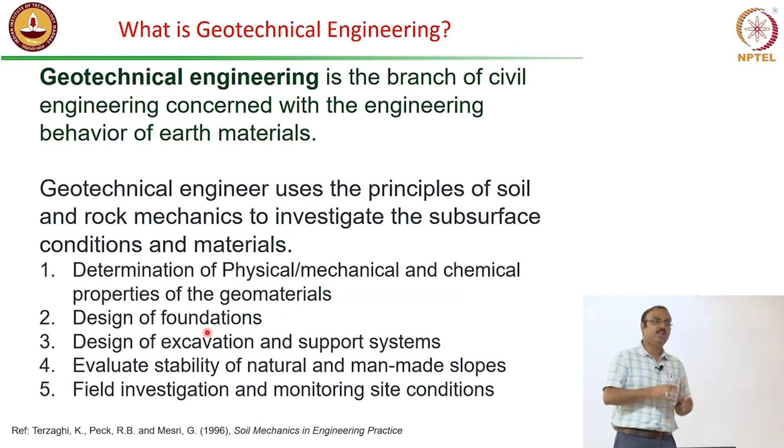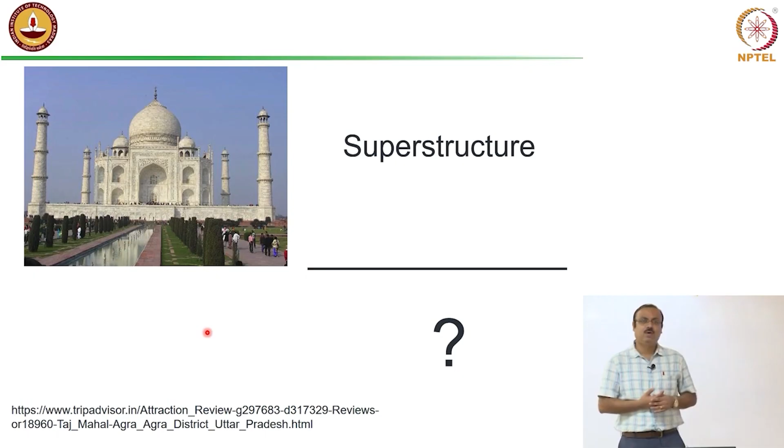Now everybody knows this, right? The Taj Mahal - it is one of the wonders of the world, but the problem is we all see the superstructure, but what is there at the bottom? We had almost no clue until several years ago. There were a lot of speculations, a lot of old scriptures that say what is there, how the foundation of the Taj Mahal is, but finally our structural group, Dr. Arun Menon, who has given a lecture on architecture and heritage structures,

along with the Archaeological Survey of India, excavated part of the site of the Taj Mahal, and what we saw is very interesting. This is the excavation we did, and this is the base of the structure, and this is what the foundation looks like - this kind of well-type shape. Have you seen this? This is a well. This is called a special type of foundation material element - it's called a well foundation.

It's just like your regular wells, below the Taj Mahal. There was a scripture about this, so we are not completely surprised to see this. There are earlier old scriptures which say that there is a well foundation used in the Taj Mahal, below that. So it's a very interesting thing.

So these are the wells. There are hundreds of wells below this structure, and inside these wells, it's filled up with any kind of debris, whatever was available nearby at that time, they just dumped it. Some wood pieces, some tree trunks, all kinds of stuff. They dumped it, did a little bit of compaction, whatever was possible in those days, and they built the structure.

And it was so nicely standing. There was no problem at all in the foundation or any kind of tilting of the superstructure. So these are very interesting facts. Without knowing foundation engineering itself, people were doing that kind of wonders, because these are coming from practical sense.

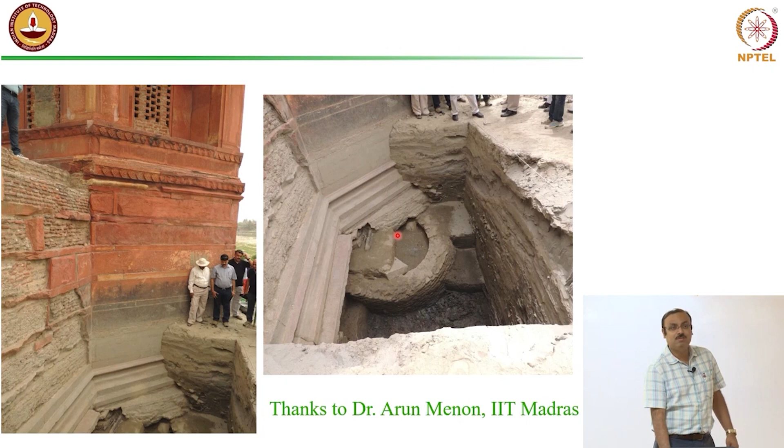So what does it say? Richard Handy says a very interesting comment, that virtually every structure is supported by soil or rock, except those that either fly, float, or fall over. It's a very cynical line, but this actually tells the entire story, that everything there is a foundation. Without foundation it will never be able to stand.

In his practice, a civil engineer has many diverse and important encounters with soils. So as a civil engineer you will just go through different situations. We have just started with the introduction part. Now you will see exactly what are the different challenges a geotechnical engineer will have, as a civil engineer, you will be handling.

First one, of course, as I said, there is a foundation. There are two types of foundations generally available. One is called shallow foundation. This is your superstructure, very obvious, and at shallower depth you have this slab. In plan, it will be something like this. So this slab is nothing but your foundation. This one we call it shallow foundation.

There are different types of shallow foundations available: isolated footings, combined footings, raft, different types. But one of the common features of them is that the depth of the foundation is not a very large value. Usually the criteria is that the depth of foundation should be less than the width of the foundation. That's the thumb rule we specify for shallow foundation. Shallow foundation is one which rests or which will transfer the load of the superstructure at shallower depth. That is the idea.

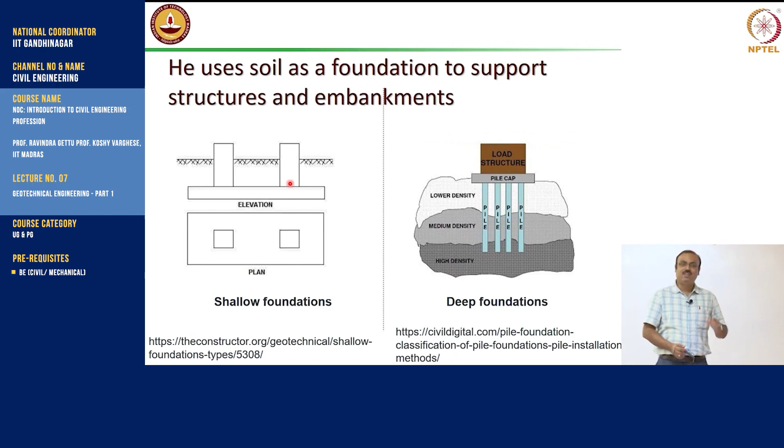Now, in those kinds of situations, what do you have to do? The foundation, by sinking itself, gave you a hint that there is a soil issue. It is not that the soil is bad; there is a soil which is slightly below that area, which can take that load.

So, that is why I am sinking up to a certain level. So, what you have to do is transfer the load to a deeper depth. That is where the term deep foundation comes into the picture.

So, now there is a structure, maybe a heavily loaded structure, then there are piles. These members are like your columns. It will transfer the load to a much better soil which has very high density. Maybe the rock itself can transfer the load.

It is very similar to your stools. Piles are very similar to the stools we sit on. You sit on top of some kind of platform, right? If there is no leg, what will happen? You and the platform both will collapse.

So, there are 4 legs to the platform. What are these legs doing? Your load, which is resting on that platform on top, gets transferred through those 4 legs to a ground which can take that load, isn't it? So, those 4 legs in geotechnical engineering are just deep foundations or piles.

There are many types of deep foundations. One of the most common is piles. Wherever the soil is good at a much lower depth, to reduce the settlement of the structure, we generally transfer the load to that competent soil layer. This is a key word, competent soil layer, meaning the layer is competent enough to take the load of the superstructure.

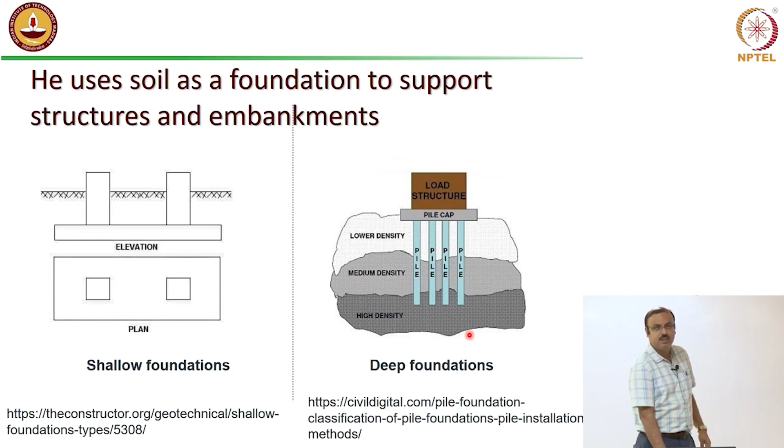Like a 4-legged stool, you can sit and it's safe, but if an elephant is sitting, it may break, right? So you have to design a stool, design those legs based on the loading. So, that is where the size, shape and depth of the piles will be determined by the geotechnical engineer.

Now, very important - the civil engineer uses soil as a construction material. How many years we have been doing this, I do not know. Since ancient times we have had mud houses, isn't it? This slide shows mud houses, very standard, still found everywhere in the villages. And technically it's simple, but it is kind of sustainable, as we are seeing.

Now, more importantly, the soil can be used as embankment material. Like you see, this is constructed using soil only. So this side is the water - what is the purpose of this? This may be the flowing river.

So what this embankment will do is, even at a raised height of water, it will protect so that the water will not flood the agricultural field. There may be cases where the rise of water goes beyond the height of the embankment, and then it will flow over, but that is an extreme situation. In general, under high flood situations, we consider what should be the height of the water, keep some 1.5 to 2 meters on top of that, and create the embankment based on the soil.

Now, of course certain properties of the soil will be evaluated to choose the material. Not all soil, whatever is available locally, can be used. There are certain characteristics of the soil required for it to be selected as a good embankment material. This is another major infrastructure involved in the day-to-day life of people, isn't it? We see these everywhere, we call them earthen embankments.

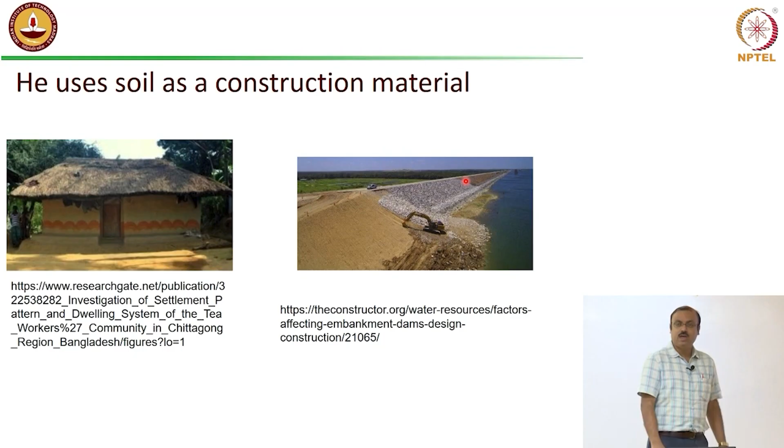So, if this wall is not there, what will happen? The soil from the back side will start caving in the excavation zone. You may think, what is the problem? Okay, it may cave in, then I may remove it after some time, then continue.

No, if the surrounding soil caves in, what about the surrounding structures? They are already existing, right? It's like you are standing and the ground below you is going. So what will happen to the building? They will definitely collapse, tilt, or crack. Then what happens? The owner of the building will put a case against this work, isn't it? So everything will stop. These are very critical things.

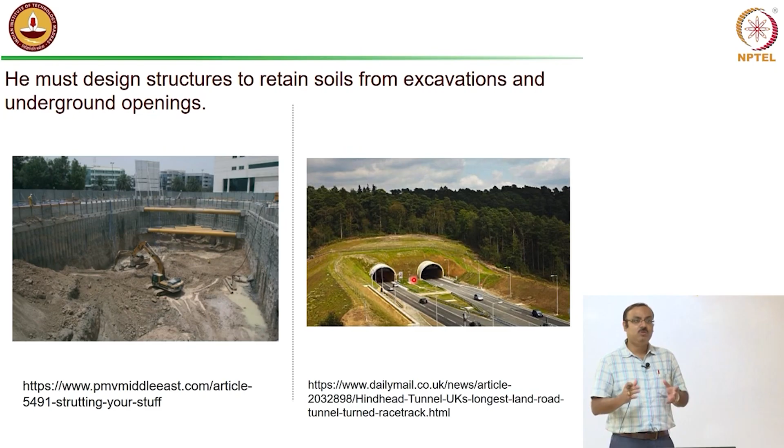So based on the soil characteristic, physical behavior or mechanical behavior, you have to choose the type of equipment to be used. Then the soil can be encountered in whatever we discuss now, which is a kind of standard thing - foundation, excavation, embankments, and all those things. But there are certain cases where you may encounter soil in some very specialized or sudden severe situation.

One of them is, let's say, an earthquake happens. What will happen? If there is an earthquake, usually there are two phenomena very common. One is called liquefaction, another is called sand boil. It is something like this: you shake it, the ground will be shaking, right? Earthquake means ground shaking. Ground will be shaking, what will happen?

The top soil, if it has a certain characteristic, is not so favorable. What will happen? That top soil will behave like water. That is, it becomes like a liquid. Now we all know that liquid has shear strength of zero, right? Liquid cannot take any shear, water cannot take any shear. So that is simply the thing that happens.

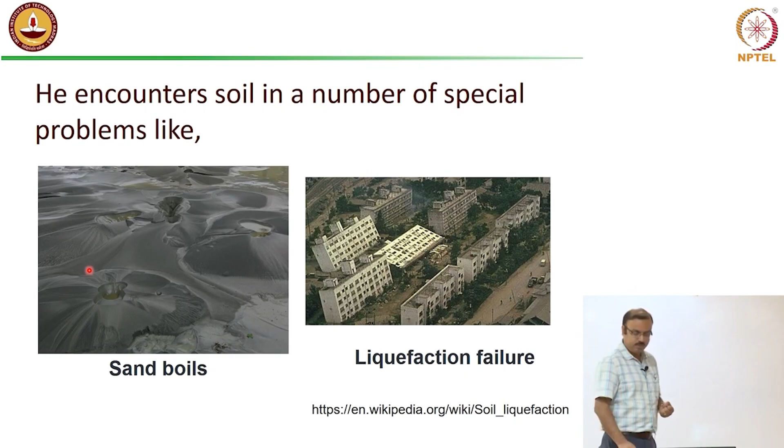Now, even if there is no structure, just a regular road or highway, there is a chance that a fountain type of behavior generates. So the bottom soil, as the top soil becomes almost liquid, the bottom soil will start floating and coming up like a boiling type of situation. This is what happens - these are things very common that happened in the Bhuj earthquake in 2001 in Gujarat. These are very common features.

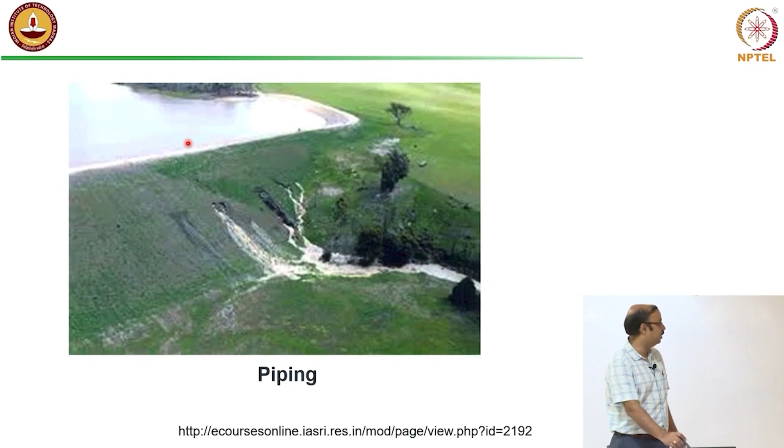Another major catastrophe is piping. Remember we discussed embankments? So this is the embankment and this is the storage reservoir. This is the water stored, which can be for agriculture, drinking, or industrial application. It is a big reservoir.

But due to certain failure or lack of monitoring, there will be a problem on the downstream side. This is the upstream side where water is stored. On the downstream side, a situation arises where water forms a pipe-like channel below the embankment and comes up here, coming basically from the reservoir itself.

You may say a little water coming out is no problem, but it's not the amount that matters. First, small amounts over the years may cause substantial loss of water from the reservoir. At the same time, as water goes through below the dam, part of the dam material gets washed away.

Finally, this part of the dam becomes extremely weak and this zone becomes critical. In geotechnical terms, we call it reaching a critical hydraulic gradient, meaning the flow occurring is such that the ground cannot contain it, so the flow comes up and forms a stream. Two problems occur: you lose water from the reservoir, and the dam itself becomes weak because it's being washed away every day. This is another challenging situation requiring geotechnical engineers' intervention.

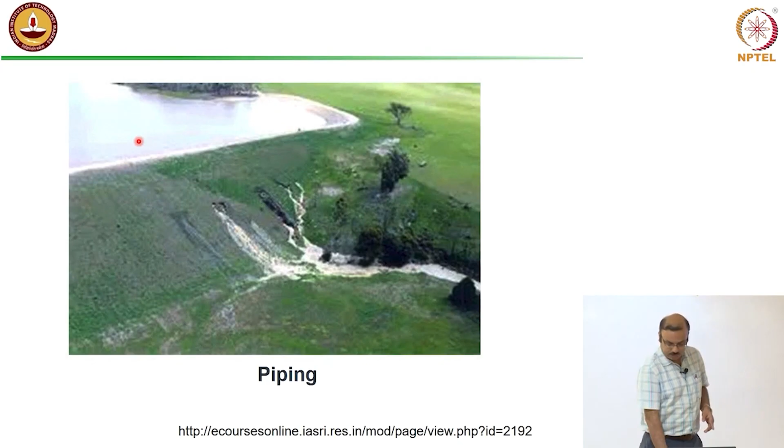Now, finally, there is one more very important thing called expansive soil. There are certain types of soil with a strong affinity for water. In the rainy season, when the ground is wet, they absorb water. While absorbing water, their volume increases - it's simple common sense. If you pour water on a mass of soil, the volume increases because it absorbs it.

Now once monsoon is over and it's a bright, dry season, they will expel the water very fast. While expelling the water, the volume of the soil will reduce - it's a kind of shrinking to a smaller volume.

Now consider a structure standing on soil doing this kind of thing. In rainy season it absorbs water and increases volume, and in dry season it expels water and shrinks. This building below, when the soil volume increases, will experience an uplift type of upward pressure, and then after 6 months in the dry summer season, when it shrinks, this building will go back to its original situation.

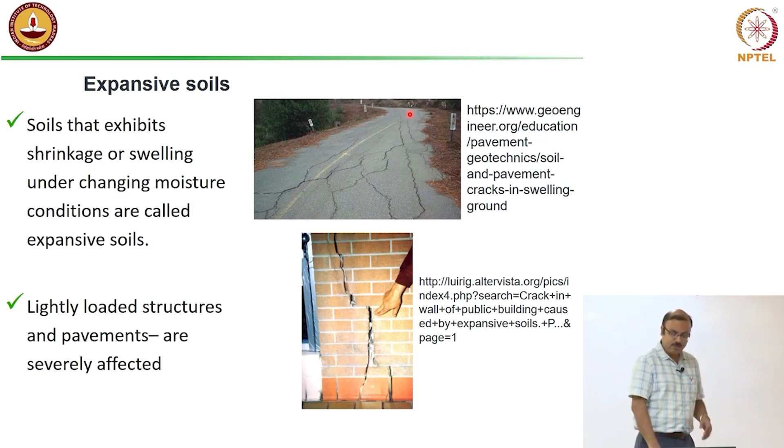The soil below pavement will expand and contract regularly, causing unforeseen stress induced to the bitumen top layer, which will try to open up depending on the extensiveness of the volume change. This is called the swelling and shrinkage nature of the soil - the soil will swell and shrink depending on the amount of water going inside it. This is very dangerous, particularly for lightly loaded structures.

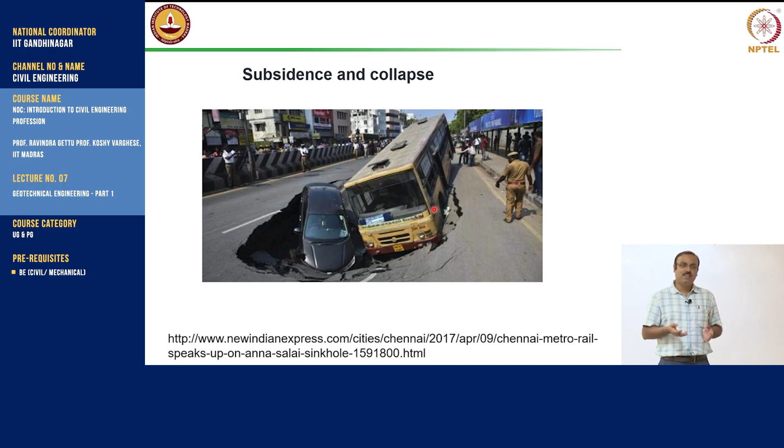This car and bus got all caved in. In these situations, geotechnical engineers will be called, and they have to run around and see what is the reason behind that, what should be the precautionary measures, because the issue about geotechnical engineering is you cannot simply say no, we shouldn't do the tunnel. Tunnels have to be done, because you have to run the metro, but at the same time you cannot let the bus collapse. So you have to manage both sides.

So you have to design your tunneling methodology in a way that it will have minimal disturbance to the road on top. This is the real challenge, because soil in every part will be different along the long stretch of the road. So you have to have proper identification of the soil, what type of soil you are digging, what kind of precaution you are taking.

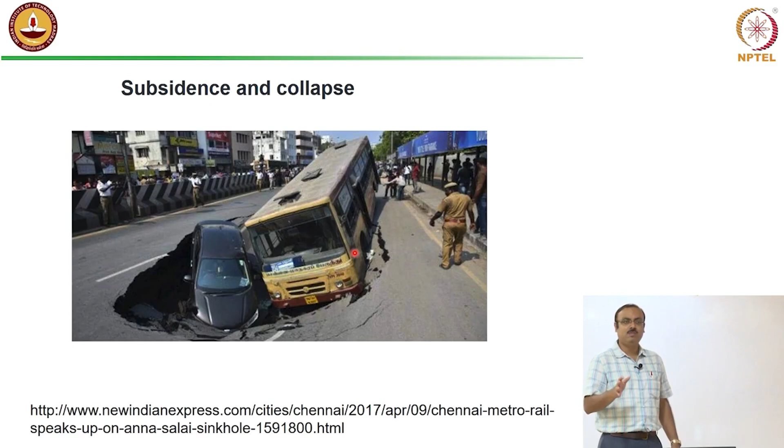So continuous monitoring will be the important, key issue here. All around we should have continuous monitoring to see if there is a gradual settlement, because this may seem sudden, but this kind of thing happens gradually. It's not that one day it collapses like that. Over the years, or at least over the months, there will be settlement going on. So you have to have a telltale sign that settlement is going on, which may be excessive, so you take some necessary precautionary measures. That is also the geotechnical engineer's job.

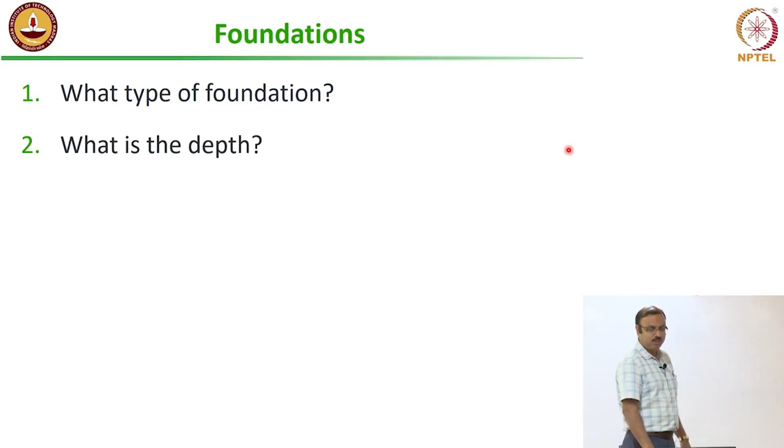So now let's look at foundations, because when all is said and done, 50% of the geotechnical engineer's job will be related to something with the foundation. Let us look in a bit more detail at the foundation part. We have to decide what type of foundation, what is the depth, what is the size.

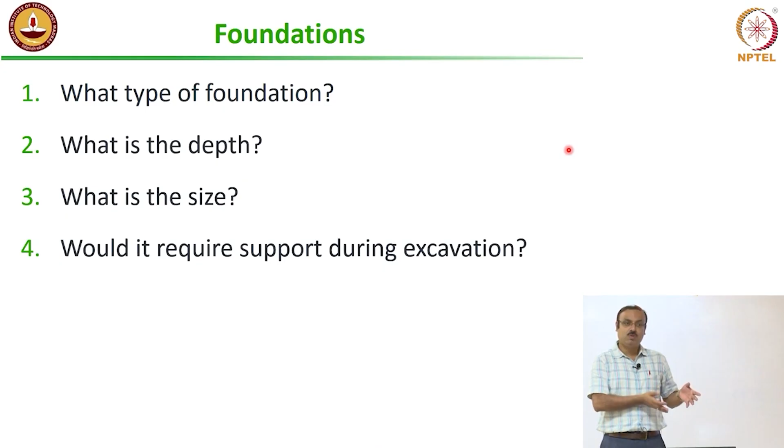Would it require support during excavation? That means while you are constructing the foundation, whether you need to support the surrounding soil, for the safety of the people working there, and at the same time to ensure the safety of the adjacent structure. Would it be necessary to lower the groundwater table?

In all the coastal cities, the groundwater table is almost at the surface level. If you dig up the soil, water will start flowing in. If water flows in, it's not only an inconvenience to the people working, but the machineries and electrical lines will also get affected. So you need to lower the groundwater table in the vicinity of the work site, and then do the work. After the work is over, you recharge it and let the groundwater table come back to its original level.

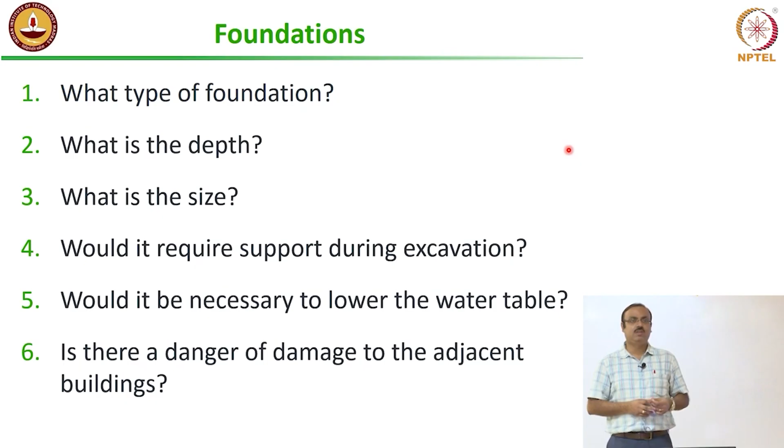So whether it is necessary to do that, is there a danger of damage to adjacent buildings? With all these work activities, are you disturbing the nearby structures or residents? You may have a pile, like you've seen in the foundation, and when the pile is getting installed there is a method you have to drive it, so there may be noise coming to the building. Nearby residents may complain that it's like a hammering sound, day and night there will be hammering. These are the practical challenges a geotechnical engineer also has to face.

Uniform settlement will not be a problem structurally, but the problem is: is there a pipeline going down below? Let's say there is a sewerage pipeline or water supply pipeline. If the building settles 100 mm, all the pipes will get broken, right? Connections cannot take that, particularly if it is a concrete pipe, the connections will not be able to take that kind of pulling or pushing effect. So it is not just structurally, you have to think from the utility point of view also.

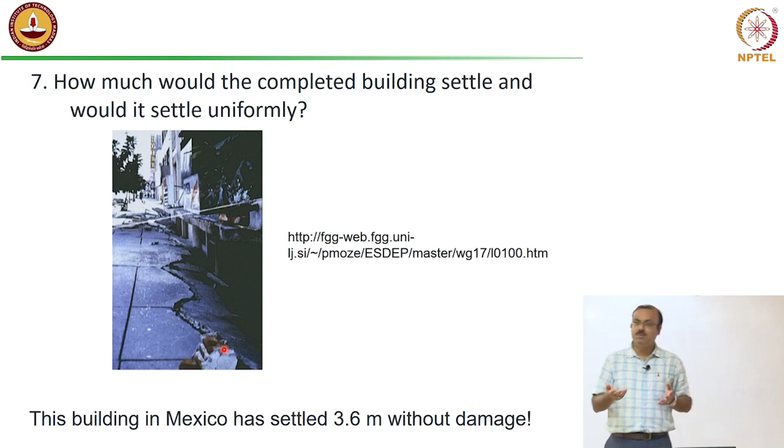Now, if it does not settle uniformly, then that is even more of a problem. That means one part is not settling, the other part is settling. What will happen? The thing may tilt, it may break the beams and columns, because beams and columns will not be able to take that additional disturbance of the moments coming.

So how do we analyze the stresses below a foundation? Let's say this is our foundation - stresses below the foundation occur because the building load coming on top will be distributed over a certain zone. Let's say I have a 100-meter depth of soil and a foundation like this. Do you think that 100 meters below this building will be stressed? No, right? After a certain depth, there may not be any load coming from the building. So what is the zone below the foundation which will be active, meaning which will be stressed?

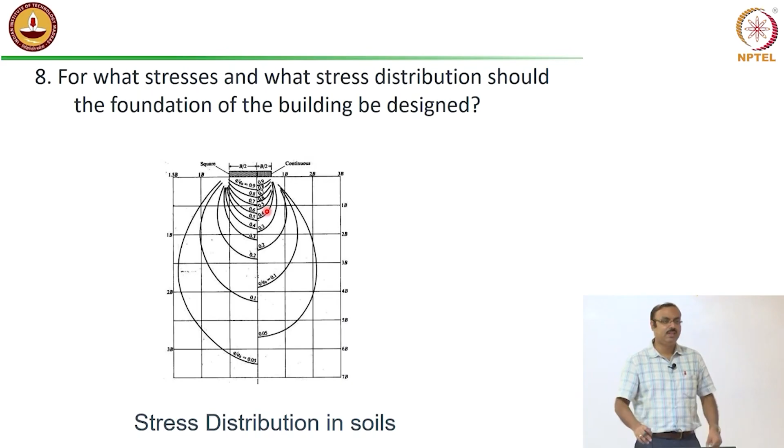Obviously, right below here it will be maximum stressed. As you go down further, the intensity of the stress gets reduced, and beyond a certain depth it can be negligible. This is called the pressure bulb below the foundation - a very important term. The pressure bulb below the foundation is a zone where, due to the foundation load, the stress will be significant in nature. Whatever settlement occurs will be due to the settlement or compressibility nature of the soil within this pressure bulb. So the soil within this pressure bulb will compress and get reduced in thickness.

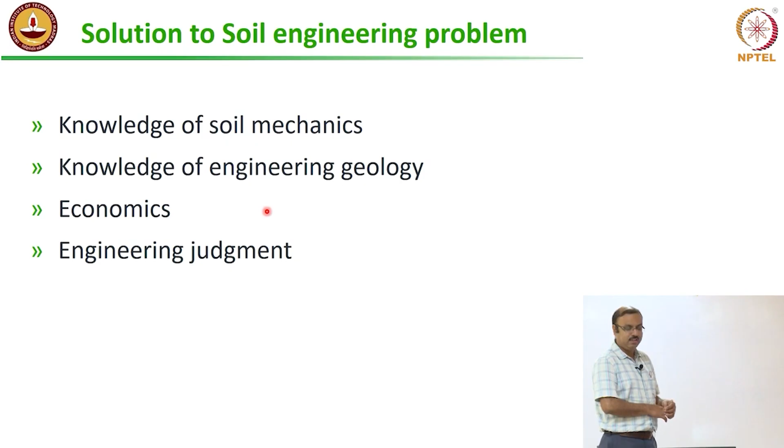So the solution to a soil engineering problem requires soil mechanics, engineering geology, economics, and engineering judgment, as you have seen in earlier classes. The term soil mechanics was coined by Professor Karl Terzaghi in 1925 in his book written in German. He is considered the father of geotechnical engineering. According to him, soil mechanics is the application of the laws of mechanics and hydraulics to engineering problems dealing with sediments and other unconsolidated accumulations of solid particles produced by mechanical and chemical disintegration of rocks. This is very important - he was the first to technically use the term soil mechanics.

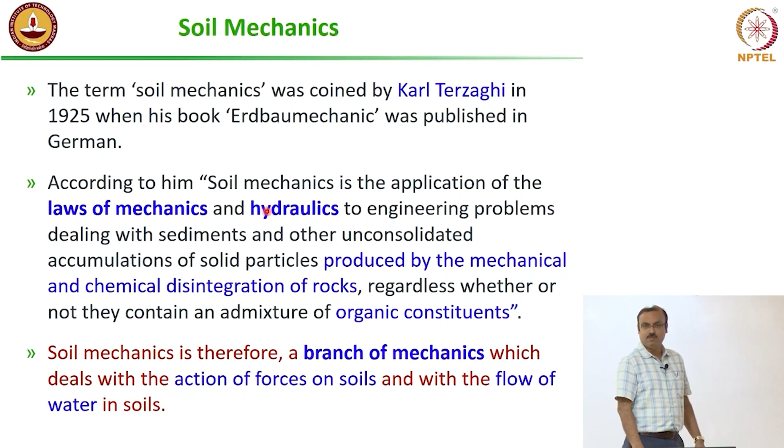Soil mechanics deals with sediments formed by the weathering action of rock. It is therefore a branch of mechanics which deals with the action of forces on soils. Importantly, it involves the flow of water, because below you there is a mix of water and soil, isn't there - there is a groundwater table also. That is where the problem comes, because solid mechanics and soil mechanics are slightly different.

In solid mechanics, you are talking about a fully solid material, but in soil mechanics or geotechnical engineering, you are dealing with a material which has solid, liquid, and void space as well - which is neither solid nor liquid, like some kind of air infill. So always in soil mechanics, a foundation or geotechnical engineer deals with a situation where three different phases are always present: solid, liquid, and gaseous phase. Any sample of soil you take will have water, soil particles (the solid phase), and the gaseous phase. That is the big challenge - that is why some people want to call it particulate mechanics.

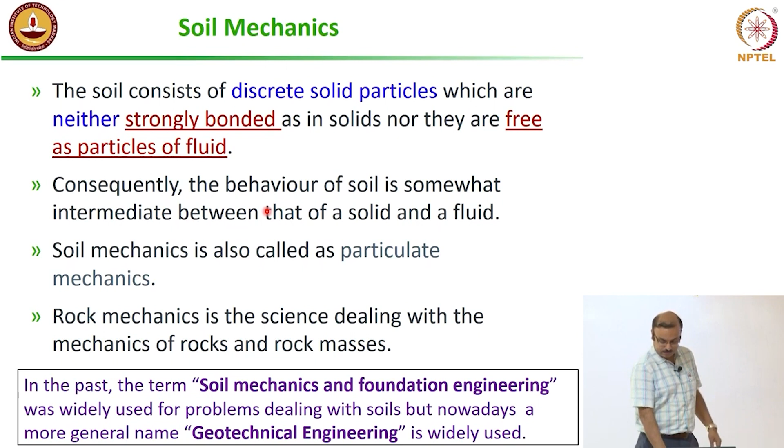Karl Terzaghi famously commented in 1951 that on account of the fact that no glory attaches to foundations, the sources of success or failures are hidden deep in the ground, building foundations have always been treated as stepchildren, and their acts of revenge for the lack of attention can be very embarrassing. This is a classic comment, that most of the time foundation engineers and civil engineers ignore the foundation.

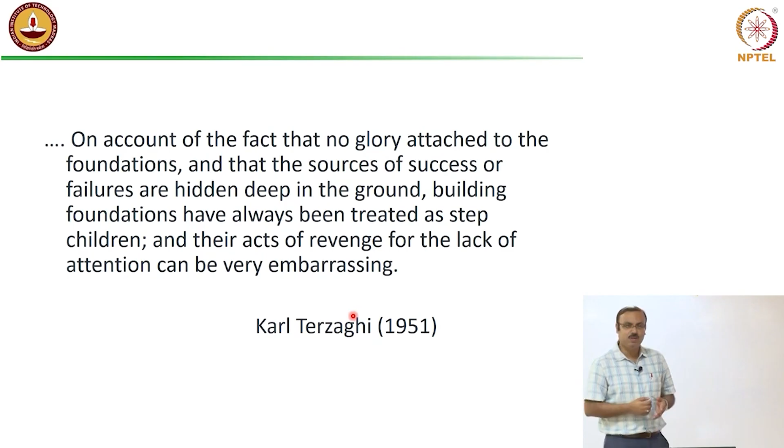Like I said, after some years we do not care about laptops and other things. Same thing, we think that it is there and it is not visible to the naked eye. That is why we forget that there is a material there which is actually taking the load. Whatever beautiful structure you construct, ultimately the load will be going to the foundation below. Unless we take care properly in the foundation, it can be catastrophic in nature.

So, brief history of soil engineering, we have used it for many structures. Historically, in India we have the Taj Mahal, pyramids, the Great Wall of China, all kinds of marvels, but everything stands because there is serious involvement of geotechnical engineers.

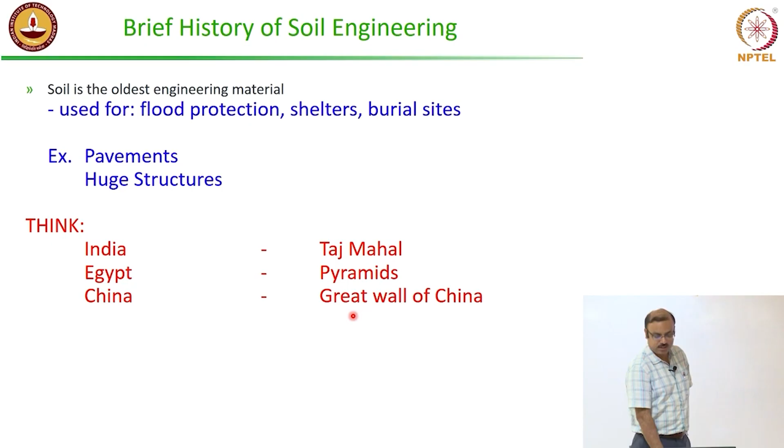So who are the pioneers in the field? This is the famous person, Leonardo da Vinci. Although he is known for his other works, he is the one who first started analyzing soil in a mechanics way. He coined the term angle of repose of sand, meaning without support, what is the angle through which we will stack the sand, what should be the optimum angle beyond which the sand will start rolling off.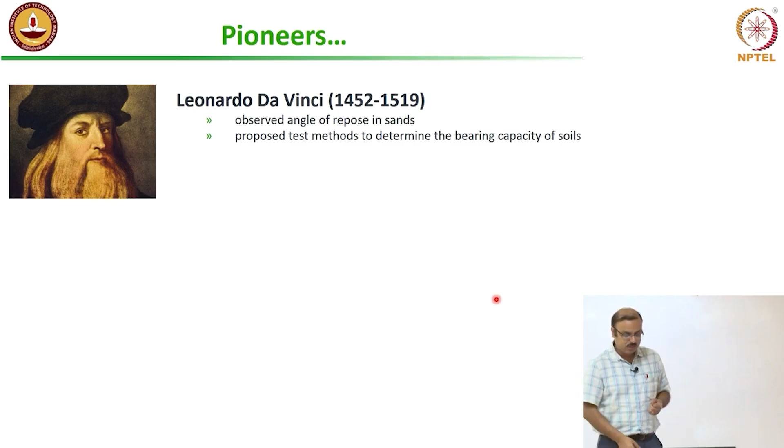So he started a test method to understand the bearing capacity. Bearing capacity means, as I said, how much a soil can bear the load, that capacity, how much resistance it can provide to the building. So he started all this in a very interesting way.

Next is another famous person, Coulomb. He is considered the first to use, in fact he first designed some kind of geotechnical structures in terms of embankments for the counter fort walls to fortify certain forts in Caribbean. And he is the one who first introduced the term friction, and that changed geotechnical engineering completely. He is the first to use the term friction, that the strength of the soil comes predominantly from the frictional nature of the particles.

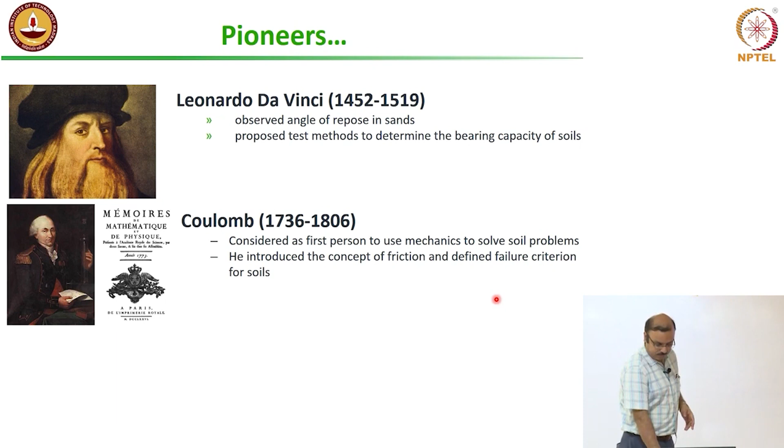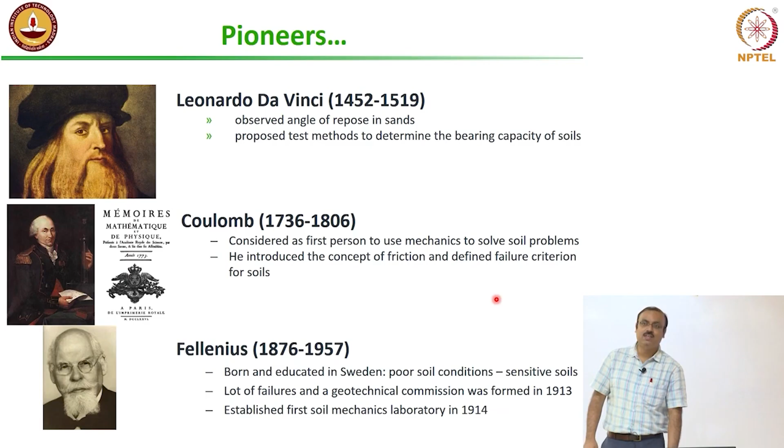So finally, this is Fellenius. He is a more recent person, I would say one of the pioneer figures in our recent times. He was born and educated in a Scandinavian country, Sweden, which traditionally has very poor soil conditions, where the soils are extremely weak in nature. So we had to invent various methods to treat that, to construct buildings, harbors and port structures for this kind of thing. He is the one who first created a soil mechanics laboratory. In history, he is the pioneer in the creation of a laboratory for soil mechanics.

Finally, Karl Terzaghi, he is the father of soil mechanics. He was born in Prague. Interestingly, he is actually a mechanical engineer. He understood solid mechanics, and then extended his knowledge of solid mechanics to soil mechanics. So he included the effect of the gaseous phase and the liquid phase in solid mechanics.

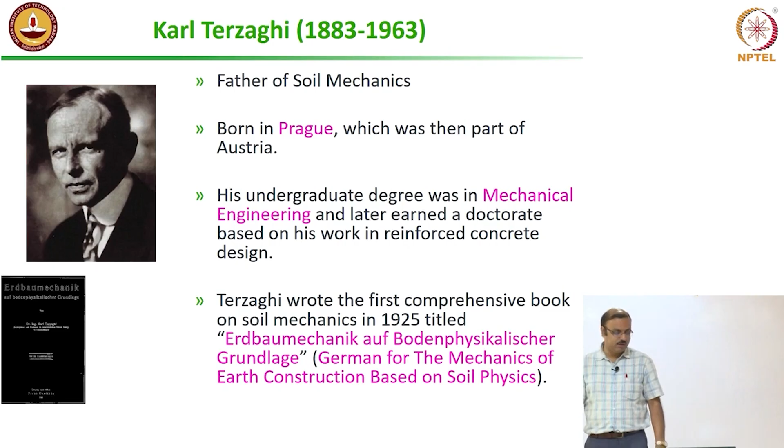All our major theories are developed by Karl Terzaghi. He wrote a book, and it is still in practice, we are still using this. Karl Terzaghi and his student, Ralph Peck, their book is the first book in soil mechanics.

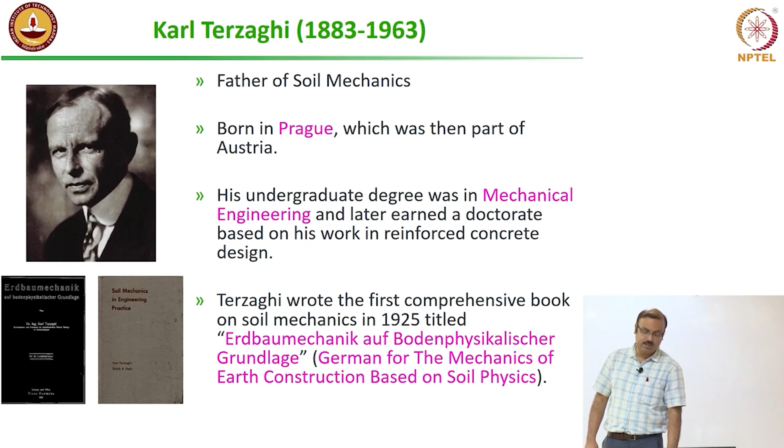So why was he, as a mechanical engineer, interested in this? It's a very enlightened story, because he was doing something on dam constructions in Europe, and he understood that there were so many empirical equations engineers were using, but without knowing the soil. So they may be using an empirical equation valid for rock but applying it for soil, or vice versa. Even within soil, something can be for granular soil, something can be for finer soil, but we are not knowing where we are applying those empirical equations.

So from that he started understanding the soil. He created his own small lab and started testing different materials, and from that he developed two major principles: one is called the effective stress principle, another is called consolidation theory. These two are the pillars of soil mechanics; all our soil mechanics theories actually stand on the effective stress principle and consolidation theory.

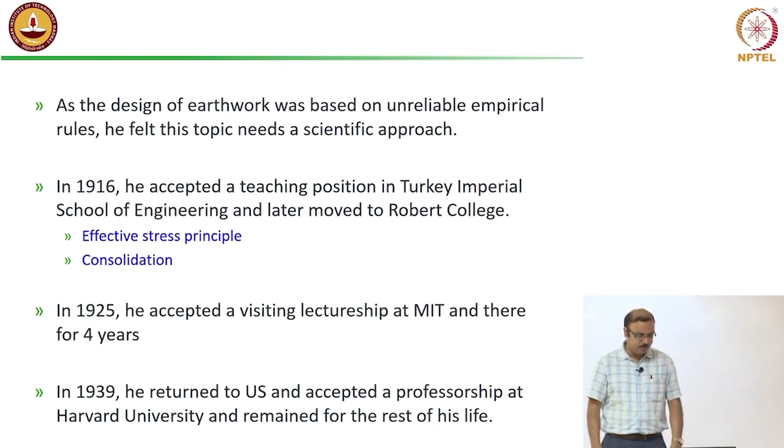So he later became a faculty member at Harvard University and MIT, and he is considered to have started the journey of soil mechanics and foundation engineering as such.